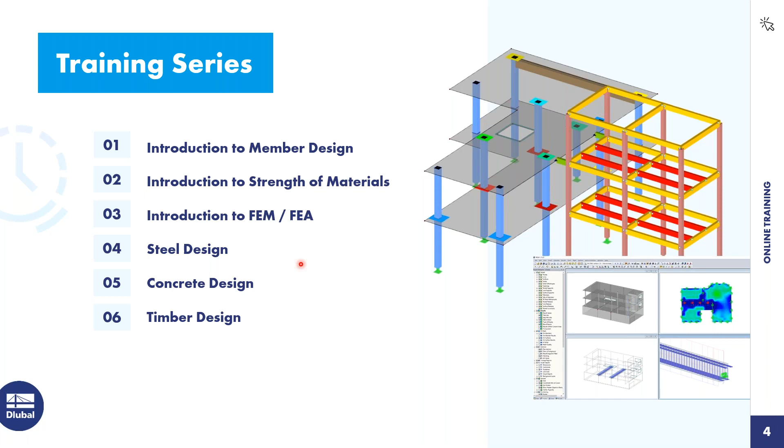Good, so our training series, 6 parts today, the 5th part, the concrete design. What can you expect from today? First of all, we start with an introductory example. We will model together a concrete beam with a cantilever, and then I will forward to Juliane and she will show you how to design our concrete slab. So let's jump right into it.

No theory, only modeling in RFEM 6. So I will open this example and create a new model. For this case, I think it's familiar for you. I'll go to File or click on New Model, and now I create in this dialog a new model with the name concrete beam. I will leave it here as 3D type of model and everything else as is.

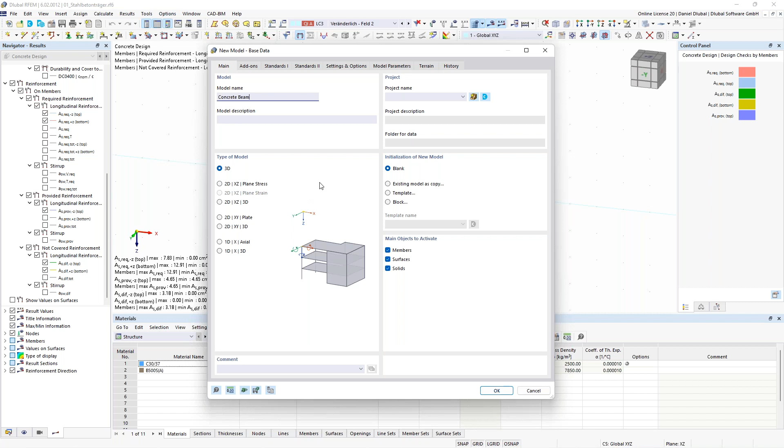And now for me it's important to activate the add-on concrete design. So here we go to the design add-ons, activate concrete design, because then we get additional design properties for our concrete beams or concrete slabs. So I have to activate this.

When I have activated this, I go to the 3rd tab, Standards. And here in the Standards, I see different chapters like for the design, standard group, load results, and also load case classification. Here I want to design it according to the European Eurocode, with the national annex of Europe. Okay, I will leave it like that and just click on OK.

And a new window opens. And as you can see on the left side, I have already some materials and section thicknesses. They are remembered from the last project I did.

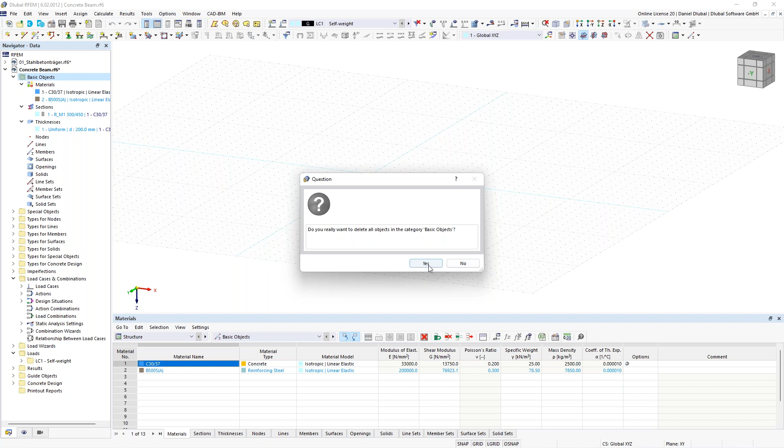So I will delete them in order to create all these 3 things by new, just to show you how to do it. You can click on basic objects with the right click and say, okay, delete all basic objects. And now we can create it from scratch.

Okay, so before we do this, I would like to know from you if you already have some skills in concrete design with structural analysis programs, just to give me a kind of status about your knowledge regarding your concrete design skills. So I have prepared a poll, which I will start right now. Please answer these questions in order to give me feedback about your knowledge.

Most of you have voted. I'll close this and share the results. So most of you have already designed concrete structures in a structural analysis program, I hope it was RFEM 6 or RFEM 5. For those who don't have this experience, that doesn't matter, you'll learn it today.

So back to RFEM. Here on the left side in the data navigator, I will create two materials because for concrete structures we need two materials: one for concrete and one for the reinforcing steel. I go to new material, and one of the biggest advantages in RFEM 6 is that I can search for a material via this text box. I enter C30/37. I'm from Germany, so I'll design it according to the Eurocode because this is the only standard I know, and this is why I choose this one.

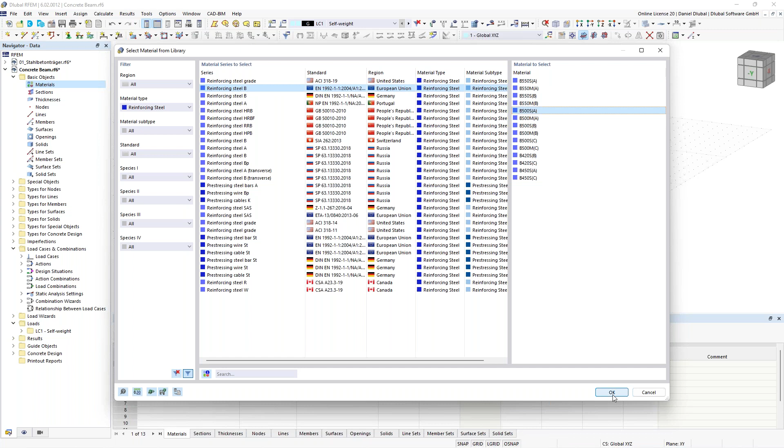The next step is I create a new material again, and here I go to the material library looking for the material type reinforcing steel. I can filter according to different material types, and the one I'm looking for is reinforcing steel, in this case reinforcing steel B. Here I see different things: B500 or 550 is for the yield strength, A and B is for the ductility class. A is normal, B is high ductility, S is for normal member reinforcing steel, and M is for mesh reinforcement. In this case I choose B500 SA, click OK, and that's it. I click OK again.

The next step is to create a new section. Since we will model and design a concrete beam, I click on section, new section, and choose this rectangle massive cross section, or if you don't have it, go to the cross section library and choose the massive rectangle. Then I give the geometry: a width of 300 millimeters and a height of 450 millimeters. Then I can see the section values according to this geometry and also the stress points, and if I want, I can also show the unit stresses. In concrete design this is not so important, but we've implemented it here too. That's everything, I click OK.

Thicknesses, I won't do right now. This will be more the part of Juliane, because she will show you what thicknesses are. Thicknesses are similar to the cross-section things for members. It's a similar concept: thicknesses you need for surfaces, and sections for members.

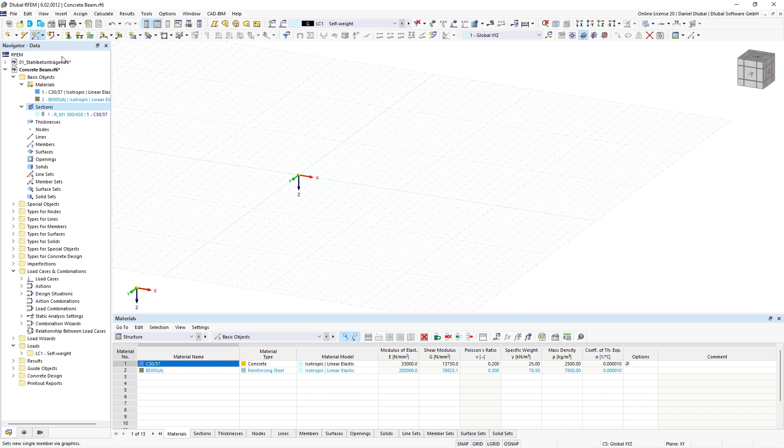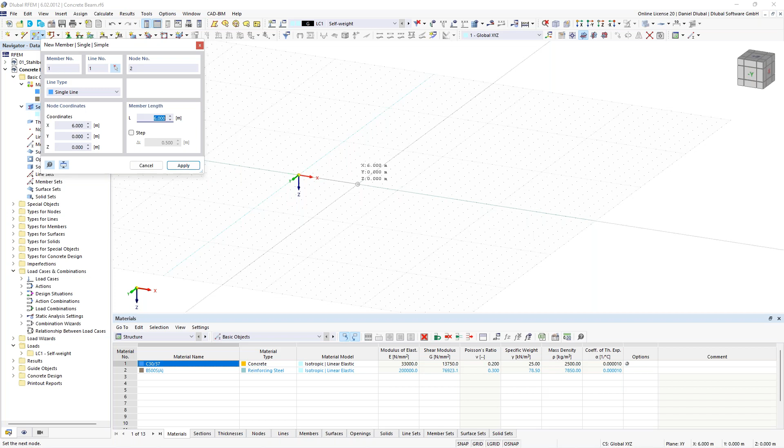So now we will model it together. We will model the beam. I go to the symbol bar, click on new single member, and now I choose the right section since I only have one. I click OK and draw this member 8 meters long. I can do this via the grid points or by inserting the member length directly, like 8 meters. As you can already see, we already have the provided reinforcement based on some general information about this concrete beam. We can modify it afterwards, of course.

What I want to do right now is divide this member internally, so the member remains as one member but we add an internal node. Double click on the member, activate the option nodes on member, and I want to switch to an absolute distance. I say from start, please 6 meters away, and here you should create a new node. I click OK, and you see this blue node. Double click on this node - it has the node type on member. This is a really nice opportunity: giving this node the option to be part of this member without dividing it.

So the next thing is support, node support. I create a new nodal support. I also want to activate the rotational constraint around the global X axis in order to prevent torsion, and then a roller support along the X axis. This is the one, I click OK. Perfect, so much for the modeling.

Now let's go to the load cases. I go to the symbol bar, edit active load case, and here I have the self-weight, this is okay for me. Now I want to also consider an imposed load case. In this case we have two fields, one field and the second field. So I create the first one, this is imposed load field 1. Now I copy it and click field 2. Now I choose load case 1 so I can jump to load case 1 where I set some loadings.

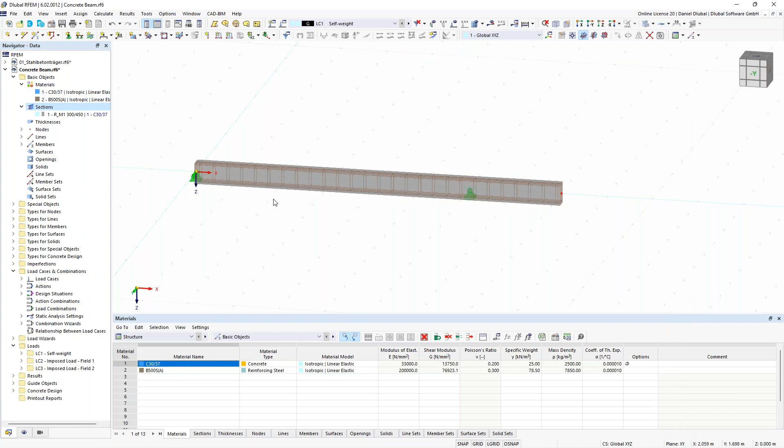So the whole concrete beam has a member load of 10 kilonewton per meter. I click on this member load and insert a value of 10 kilonewton per meter.

The biggest advantage here in RFEM 6 is that I can stay in this dialog, just select the same member, and then afterwards change the load case and add the parameters like the load magnitude again to the members. I don't have to leave this window. This is a real good advantage. So I click here on this member and say apply and next.

Now I change the load case, and now I have to change the load distribution because we only want to apply the load on the left field. So I say trapezoidal. Here in this case, I have 20 kilonewton per meter, 20 kilonewton per meter on the right side, and the load distance goes from 0 to 6 meters.

I say in this member, please apply and next. Now I change the field and say from 6 to 8. I can insert here 1, say okay. Now let's do a check. Okay, seems good. So back to the load cases.

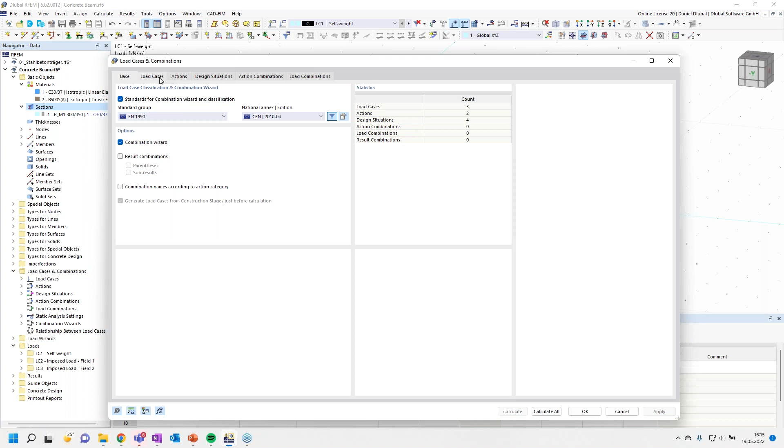Maybe a few words about that. We have here these load case classifications according to the European standard, the Eurocode, and we also have this combination wizard, which helps me combine different load cases with each other, considering the partial factors. We see here these different actions, and depending on these actions, it will get the right factors for combining it, and according to the design situations, it will combine it.

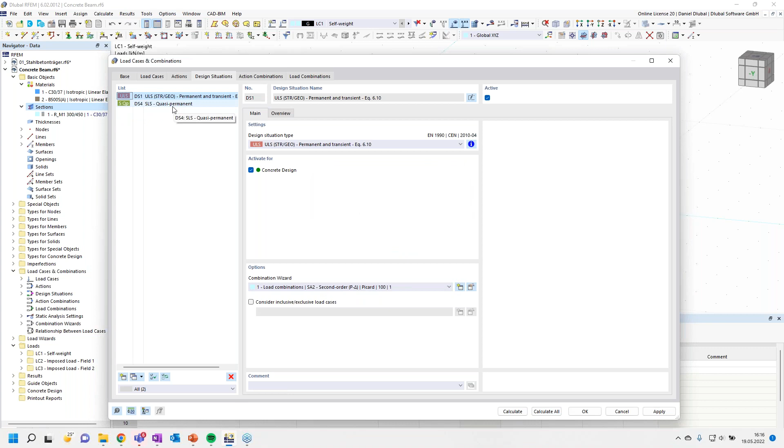You can also take a closer look at the combination rules, like here. For our simple example, we don't need so many design situations, so these two serviceability design situations, characteristic and frequent, I will delete. I only need the ultimate limit state and the serviceability design situation, quasi-permanent. Let's go to the action combinations. Here are the factors I need for my load combination. Okay, good, this is everything.

Now click OK. And now I need to define my design properties for my concrete design. So where can I do this? Double click on the member of this concrete member, and now you see the design properties. When I have activated the add-on in the base data concrete design, this option will be activated automatically. I can also deactivate this, and now you see all these registers in the upper menu will disappear.

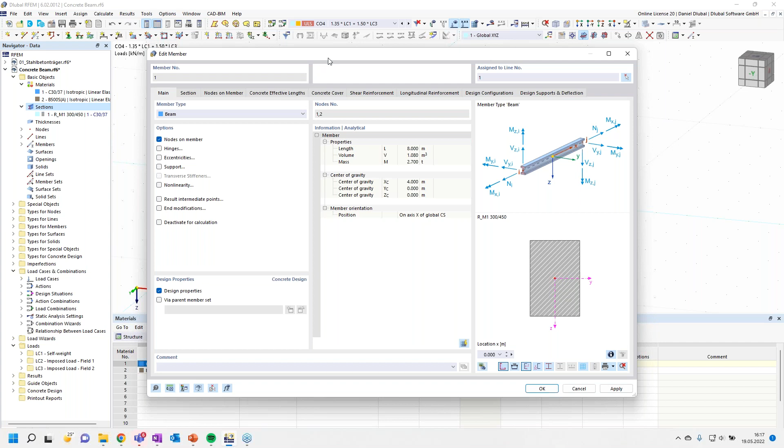When I activate it, the other tabs are there. So what we do now is go through these tabs. What we don't need is the concrete effective length for any stability proofs, but this is a classical bending member, so I can neglect this.

So I go here to the concrete cover. The concrete cover is pretty clear. You have different exposure classes in order to determine the concrete durability. You can open this. Now it's for all section sides. You can modify it. You see here these different exposure classes. Here you have XC1 up to XC4 due to corrosion induced by carbonation.

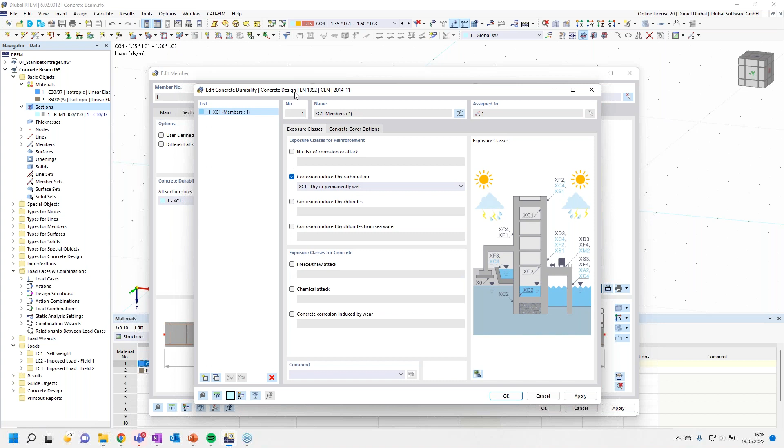Or also here when I want to consider exposure classes for concrete freeze-thaw attack and so on, and through these exposure classes, the minimum concrete cover is determined. For our simple example, XC1 is okay. I say okay again, and this minimum concrete cover is determined from the outer edge, from the concrete rectangle to the outer edge of my stirrup reinforcement.

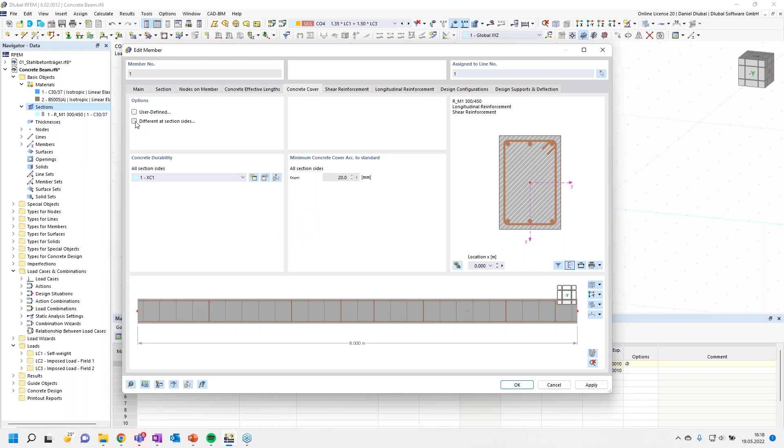These are 20 millimeters, determined by the exposure classes. I can also say a user-defined concrete cover, or when I want to consider it for each side differently, I can activate here this different at section sides option. Okay, so much for the concrete cover.

You also see on the left side you can add more shear reinforcement spans, then you can separate the distances into several fields within this member.

Okay, now let's go to longitudinal reinforcement. Here I also have some possibilities regarding the rebar type, symmetrical or unsymmetrical, and in this case I choose unsymmetrical, which means the top side and the bottom side are different. So for the top side I choose 2 and change the diameter from 20 to 12, and I also want to activate a lateral side bar with 10 millimeters. For the bottom side, I choose 16 millimeters. Okay, so much for that.

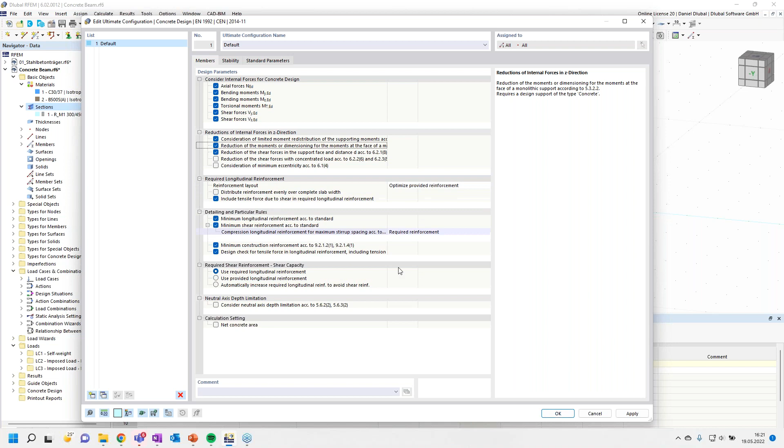Here you can define several other options for the design of concrete, these are the information given by the standards. And the same also for the serviceability, but this is some more information.

Now the last tab is the design supports and deflection. So when you want to design the deflections, the deformation proof, you have to define different design supports. We do this for this simple beam. I create a new one with a support width of 360 millimeters, and it's no inner support, only support in Z-axis. And now I create a new one, also with 360 millimeters.

It has a monolithic connection, and the ratio of moment is in this case 0.9, and I don't need to consider any Y-axis. I click OK.

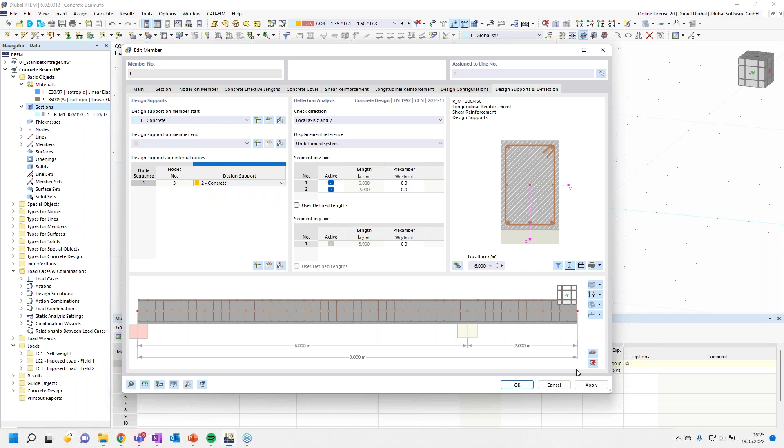Now I have to assign it to the right nodes. So that is on member start, this is correct. And now here to the middle, the second one. Oh sorry, no this is not correct. Now this is correct, I say OK.

And now I can calculate it. Let's say concrete design. And now you see how the whole situations are calculated, also for the serviceability.

What I don't need is to design for the serviceability limit state, I'm only interested in the results of my ultimate limit state. So I calculate the concrete design again. And now I see here the different design ratios for members, and I see here detailing of members, and also the ultimate limit state section resistance is not fulfilled.

So what can I do? I need to strengthen my reinforcement.

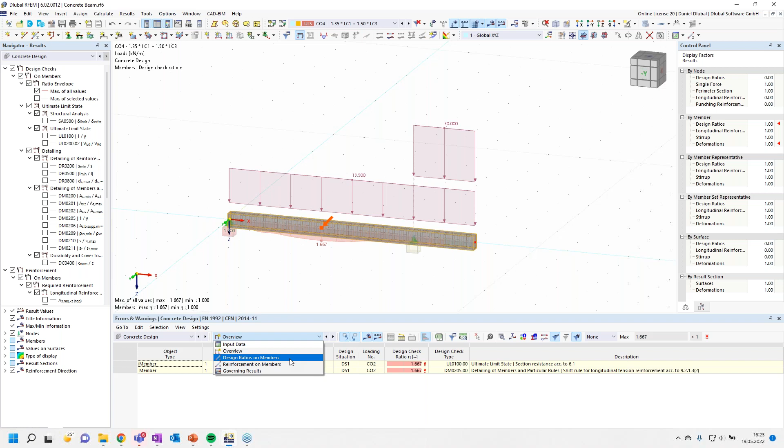Maybe here some words to this reinforcement. Here on the left side, I see the results navigator, and here I have the possibility to show different results, like the reinforcement.

So I see here the required reinforcement, maybe I deactivate the design check. I can show the required reinforcement for the top and the bottom. For the top and bottom reinforcement, I can also show the stirrups and also the provided reinforcement for the bottom side.

I can deactivate here the rendering of the reinforcement by going to the display navigator, to types of concrete design, and deactivate it. And now I can see the result a little bit better.

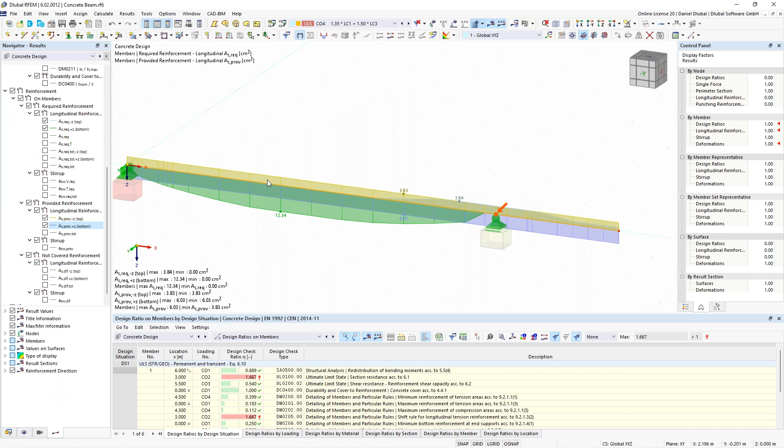So I see my provided reinforcement is lower than the required reinforcement, so I need to add some more rebars. And in order to calculate the difference, what I need, the not covered reinforcement, I can also show it. So what can I do?

Go back to the concrete beam, go to the shear reinforcement. Now we want to add more rebars for some places. So I go here and copy it. And now I want to cover it for different fields. You see the start and end goes from 0 to 4, I say this should go to 6.

And this one should go from... sorry, this should go from 5 to 7 with a distance of 0.1 meter. And the other one should go from 7 to 8 meters.

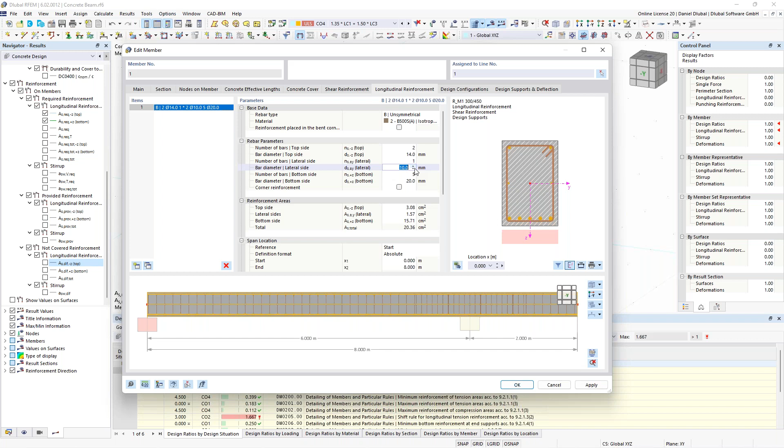And the longitudinal reinforcement, let's make it quite easy. What I can do is just increase the diameter for my top side and add a diameter for the bottom side to 20 with 2 bars more. And it looks like that. I can show this reinforcement plan by clicking this icon, and I see it like that.

Then I click OK, I design it again. And now I see my fulfilled design check ratios. And by clicking on one of these, like this one, you see this design check.

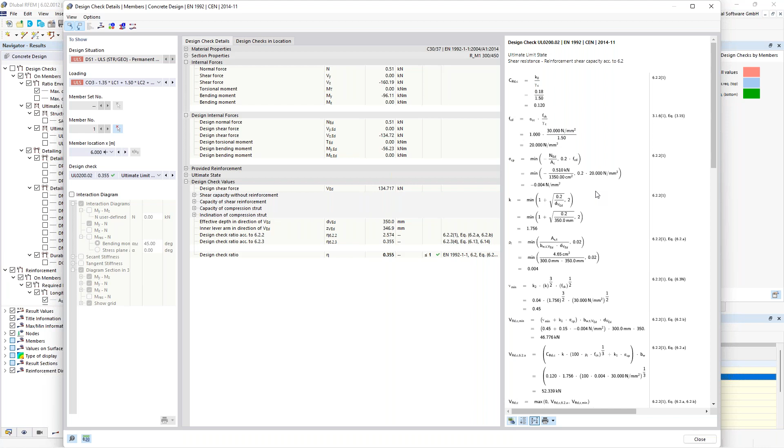Also you can switch to different design checks. In this case, we have the design check according to this standard, shear resistance, reinforcement shear capacity. And when you want to compare your results with the results of our program, you have an overview of how the program did this. Okay, so much to the beam design.

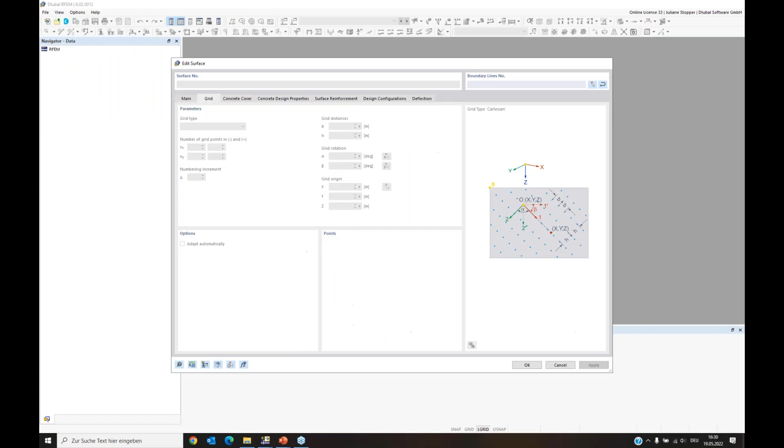Now we can go into the program and start modeling. I will again open a new model with this icon here, and we get into the base data dialog. I enter the name, it will be a slab, and it's made of reinforced concrete. As additional information, I give it here.

The other settings we don't need to change. Again, we have to activate our design add-on, the concrete design, and in the standards, I also want to keep the National Annex CEN as Daniel did. Okay, so we can agree and say this is okay.

So now an empty model is prepared for us and we can start modeling. I would like to use a guide object with you. I would like to use a background layer.

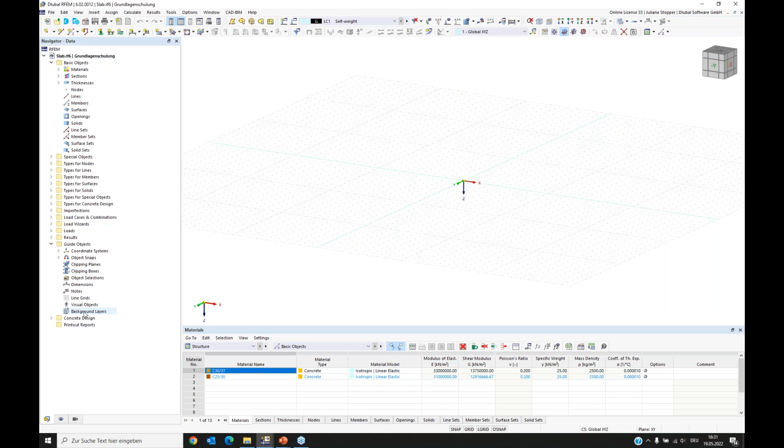We have a drawing from the architect in a DXF format, and we can use it as an orientation to create our RFEM6 model. I have to get the file from my folder where I put it, and I have here the ground plan for our slab. We have here the preview, we can check it, and looking at this, I can see that I need to rotate it with an angle of 180 degrees around the y-axis.

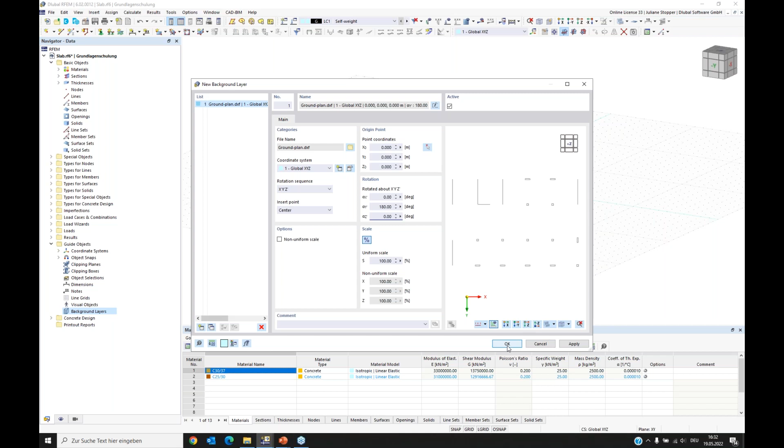Now in my preview, I see this is what I wanted. I want the ground plan to be positioned like this as a background layer. So I can say okay, and I have it in my model now.

So all these lines are DXF objects. Now I need to create my objects that I can use for the RFEM6 model and the analysis. Therefore, at first I want to start with the lines. I will create the boundary lines for the slab. We have one here, and we have one here.

If you want to end any process you are in, you can do it with right click, and you can leave the thing you are doing currently.

Now I want to copy this line. I select it, press Control, click on the line, and draw it to here. Okay, and I will do the same with this line. I press Control and put it here, and I've finished my boundary lines.

Then also I want to have lines here, because the lines we see are DXF objects, and I need to have parts of the structure modeled with RFEM6 objects. Okay, so what I also need is nodes.

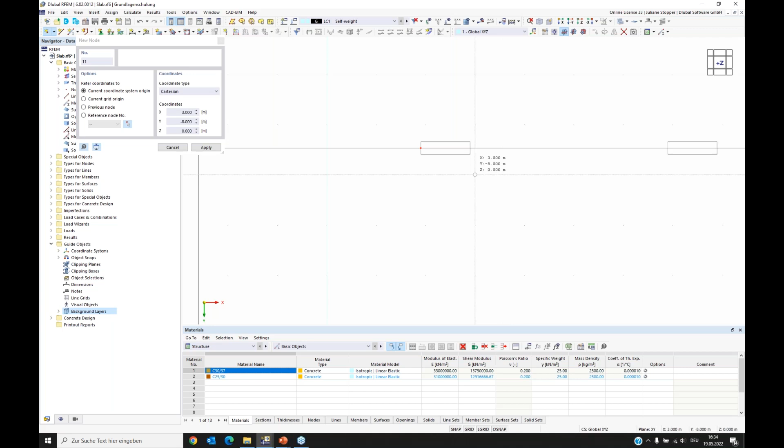So I put this node here, and I put another one here. Now I can edit this node. I double clicked on it and I can see the coordinates here. As we saw, I need 2.40. I can say okay, and it goes there. And here I checked it, I need 7.40, and then it will be at the right place.

So now I prepared the nodes on that line, and I need them actually in this line, and this axis as well. So I have to select them. I want to copy them.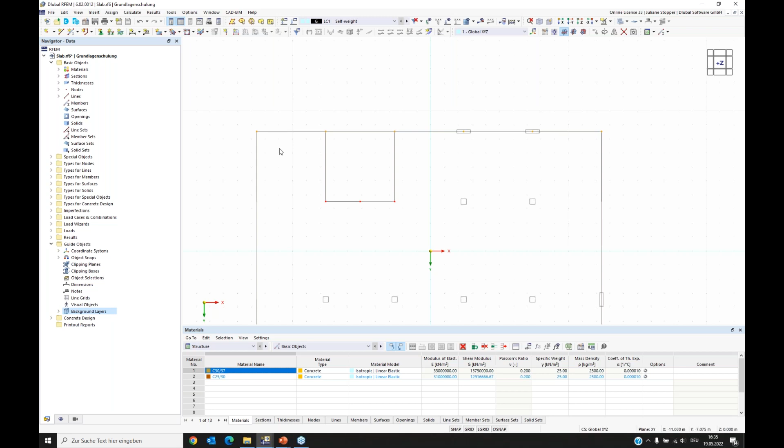With pressing Control, I can again and again add the selection. Now I want to use drag and drop. I press Control and I can take the node and copies are created, and I can put them at the place where I want them. Here's the end of the wall and it fits. Now I can see the newly created nodes again are selected, so I can go on with them.

Now I want to show you this menu. I did a right click on the node. I also can use this move and copy option. I say I want to create a copy and I have to give the displacement vector here, and now I want a vector like this. I can say apply and I can see the program copied it, and I can repeat this and do another copy into this row and say OK.

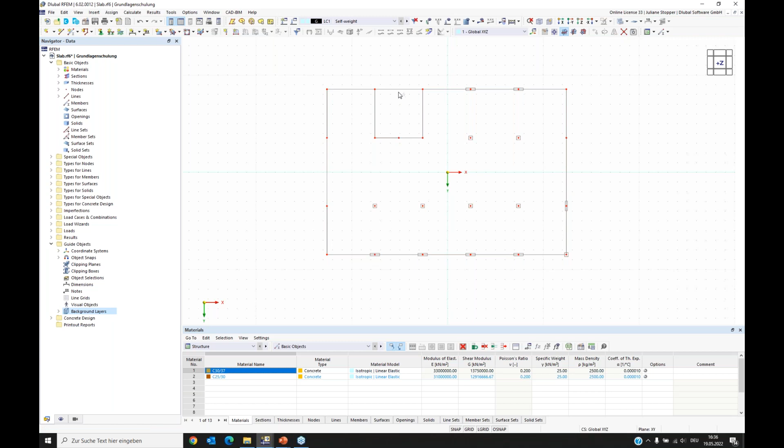And now I see I have all the nodes that I need for modeling. Now there is one thing I want to do. I want to divide this line into parts because when I want to define the surface, I want the surface to be within these lines, so I shouldn't have a line that is not divided. In order to do this, I select all my lines and I can use this option here. And now every line is divided at the nodes or lines that it's connected with. Okay, now I prepared the first step of the geometry.

Now I also want to use the data navigator and work from top to bottom like this. At first we want to check the materials, have a look at the list. I also have the first two materials from my last model and I want to use them with you. It's the C30/37 and also the C25/30 that we need.

One material is missing, our reinforcement steel. So we go to the library and choose for European Union the steel, and I want to have this. What I remembered now is here I will check this. We will have a look here. No, it's okay. I checked the standard because it's important that the standard fits to the standard you selected at the beginning.

But it fits, I have the right standard. Okay, so now my material list is fine. I can say OK and leave this dialog. Then we can go to sections, and I also want to delete it so that we can create it together.

We create a new section, and yeah, it's right, it's going to be the section of our L-beam, and it has the same material like the slab. Here we have provided cross-section types for beams, and we are right, we want to use the rectangular. We can go to this dialog for entering the dimensions.

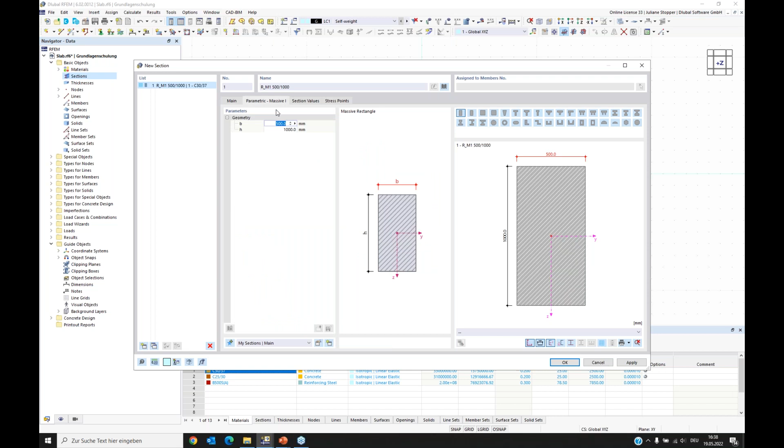Now I will show you. We want to create our L-beam, so we have 24 centimeters and 45 centimeters in the height. And we can enter this: 24 centimeters and 45 centimeters, so 450 millimeters. Okay, then I have my section prepared for the L-beam, and I also will prepare the thickness that I need for the surface.

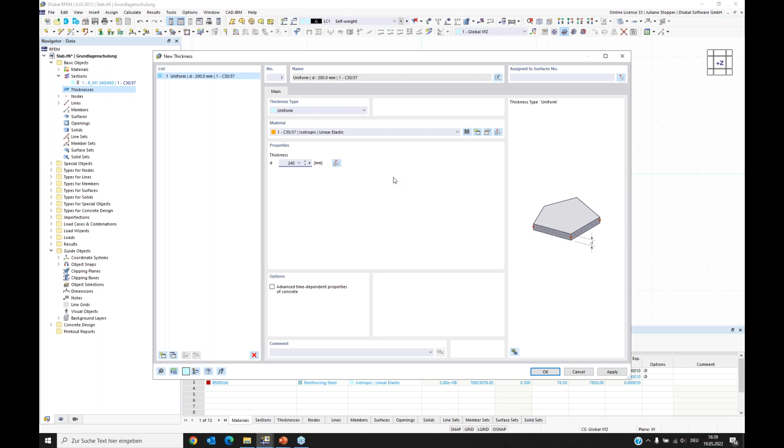As Daniel said, for beams, for 1D members, you need 2D cross sections, and for our surface, which is a 2D member, we need only to define the third dimension, the thickness for it. So we can go here. We have the dialog for the thickness. It shall be a uniform thickness. This is right, it's the material for the slab. It's also right, but it has to be 24 centimeters, so 240 millimeters. Okay, and I say okay.

Now I prepared my cross sections, then I can go on with creating the surface. I could do this from here, but I want to use an option we can reach here more easily. We can define a surface via the selection of boundary lines, and this is what I want to use now.

Here we see the dialog for the surface. Here we can enter all the things, all the options the surface has, all the settings and input the surface needs. It shall be a stiffness type standard. This is good, we have the right thickness and the right material. And as we can see, because we applied the concrete design add-on, we also have design properties. Those I want to have a look with you at later. Okay, so we can agree. And now the program, if we go into our working window, tells us what to do. You can read it here.

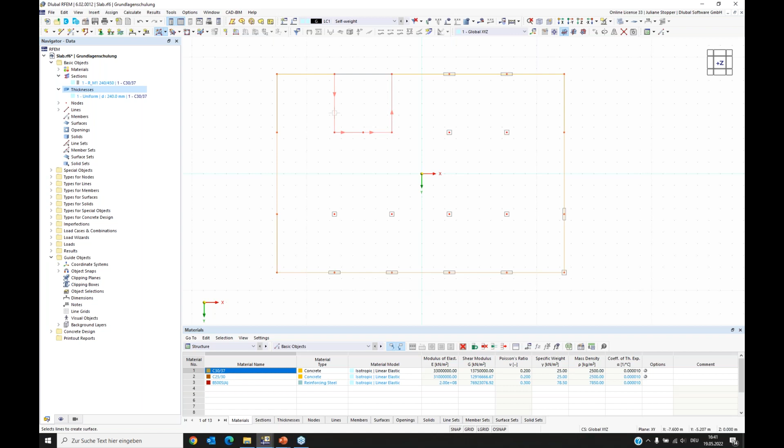When I go back with my mouse into the field, we can see that now we are supposed to select the lines for creating the surface. So I just select the lines, and RFEM6 created the slab, the surface. Okay, I can leave this.

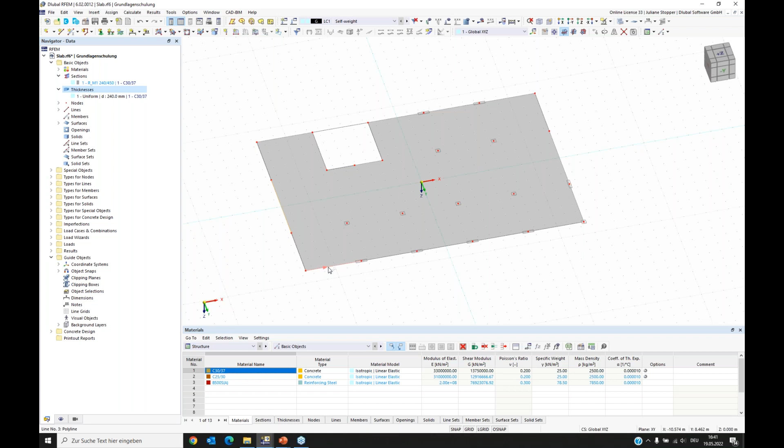I do a right click, and now I'm free again. So now I want to create the L beams. The L beams are positioned everywhere where no wall is positioned at the border lines. So I select all the lines that will get or receive an L beam between the columns. Here's going to be a wall, so I go on here. We have a wall here. Here shall be an L beam, and here are going to be walls. So my lines are selected.

I can do a right click on the line and say edit lines, and I come into the dialog for editing lines. Here I have the option to say that for these lines, there shall be a member along these lines. Then we activate it, and when we activate it, we get into the dialog for defining the member.

Here we can see the member type we have to set in the main window. We have a special member type for L beams or T beams. It's called RIB in RFEM6, and I selected it. Here you can see we want this type of member.

And with entering RIB, we see that a new register opened, and we have to look at it. Here you can decide whether your beam shall be below or above or maybe centric in the surface. We choose the one where it shall be positioned below. Okay, then we can go on.

We go into section. We have to define the section for the member, for the part below the surface. RFEM6 automatically applied the first cross section that we defined, so this is the right one. This is the one we defined, and the material is right as well.

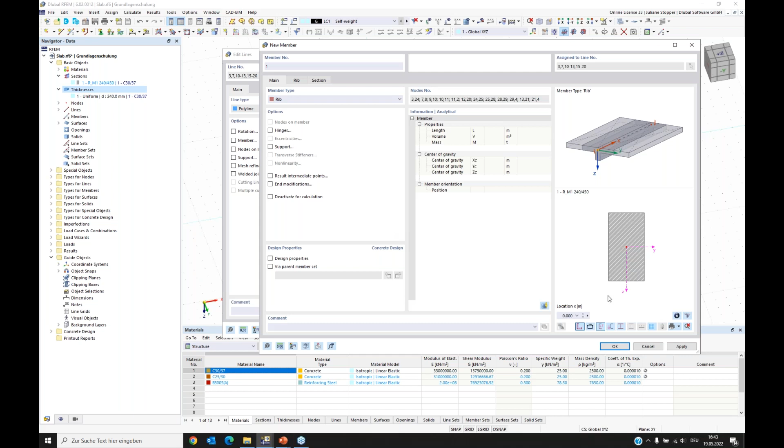We can say okay. What I want to do is switch off the design properties, because today our main object, our focus is on the slab, and we don't want to analyze the design for the RIB as well. So I switch off the design properties. The program then knows that these RIBs shall not be considered in the concrete design. And I say okay and leave this dialog.

And now all these lines have these members that we defined applied, and we can see it in the main window. Yeah, now we finished actually the structure.

As I said, we want to have the design for the slab. So we are actually not interested in the inner forces or stresses or strains in the walls or in the columns. That's why we don't need to model them. We have a special type of support that I want to show you.

At first, we go into the types for nodes. Here we can find nodal supports, and I want to create a new one. We have in RFEM6 the option to give a support that contains the stiffness via a fictitious column.

This means I can activate it, and then a new register is opened and we have a look at it. Here we can enter the dimensions and the material of the column, and RFEM6 from this information calculates the stiffness the column has. So we can model a support that behaves, from a point of stiffness, like a column behaves, but we don't need to model the column, and we don't get inner forces or something. We are not interested in it.

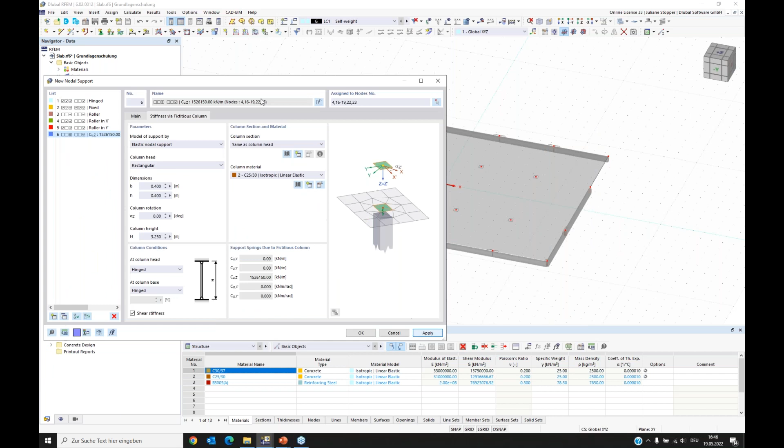And now we can apply this at the nodes where this column is positioned. Here, okay. And now again, I can say apply and stay in this dialog, as I have some more columns, and I can go on defining them. I also want to delete those nodal supports as I don't need them.

Now I can create a copy of the last support that we did together, because it again has a stiffness via fictitious column. What is changing is the dimensions. It's going to be 1 meter in the width direction and 0.25. Let's check it. Yes, 0.25.

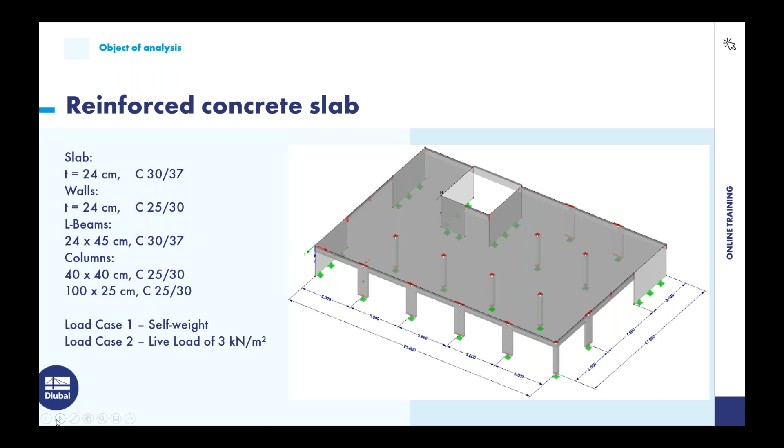It fits 25 centimeters in the height. The height of the column is 3.25 meters. This is right. And the other settings we can keep. It's right from the copy.

Okay, and I can apply these columns here, and say apply again. And I can create a last copy. Here I change only the width and height. And I can apply this or assign this to this node. Now I have all my different types of columns defined, or the supports of them.

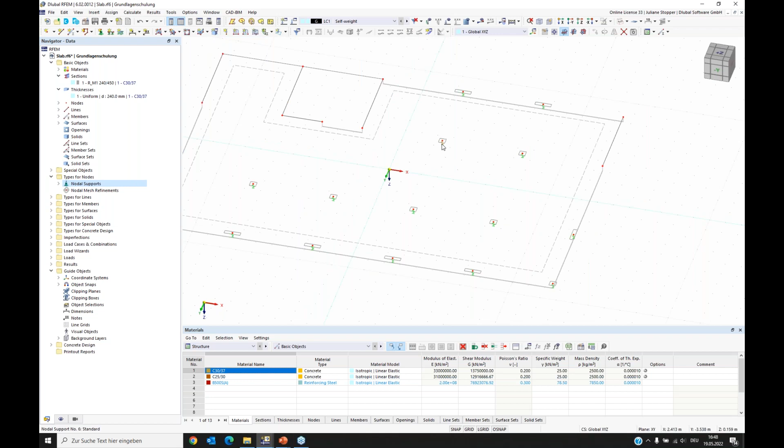And we can see it here. I can also change the display of the model. I can say that I want to see a wireframe model. Then we can see, for example, now the supports more clearly. And if you think the supports are a bit small, you can right click on them and make them bigger. Then it's easier to see them and check whether everywhere a support is supposed to be, one is. Okay, we have the same tool for walls.

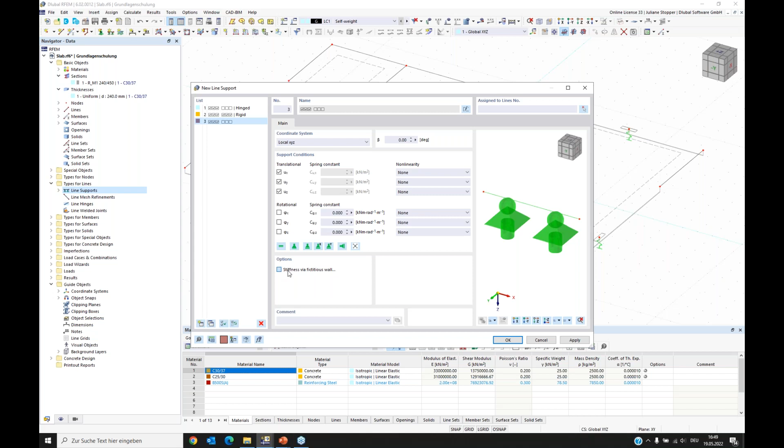We can consider the walls as line supports. So we can now go into the folder types for lines. And here we have the line supports and can create a new line support. And here I have the stiffness via fictitious wall. And I can only reach this option if I activate local XYZ coordinate system. Now you can see it's possible to activate it, and we again have to go here and define geometry and material. The wall has a thickness of 24 centimeters and again a height of 3 meters 25.

The material shall also be material number 2. And now the program calculated the stiffness that resembles the wall. The X direction is the direction along the length of the line, so we have a stiffness in this direction, and the Z direction is the vertical direction. We have also this spring. Okay, now we can assign it to the lines where we have actually walls, and they are these. And here's another one, and I think it's completed. I can say okay, and we are now fine.

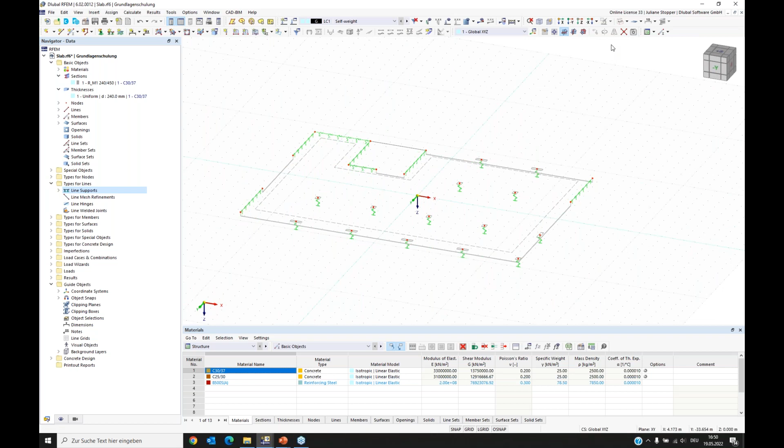Now we have all the supports that we have from the walls and columns. I again go to the transparent model, and I can see our structure. We have finished the structure now. What we need is the loads. So we can close here the settings for the structure and go to the load part.

At first we enter this load cases and combinations dialog. And again we activated the combination wizard as you saw with Daniel. Now we can go to load cases. We have as a default load case, always load case 1 as a self-weight load case. You can also see here the self-weight is active and it's a permanent load case.

And we want to create another load case. This is the live load case. And here we don't want the self-weight to be active, and it has to be an imposed loads load case. It's important that you take care about defining the right action category, because we will do the action combinations. The combination wizard is going to generate them for us, but it can only do it right if you set the right action category. So we have a permanent load case and an imposed load case.

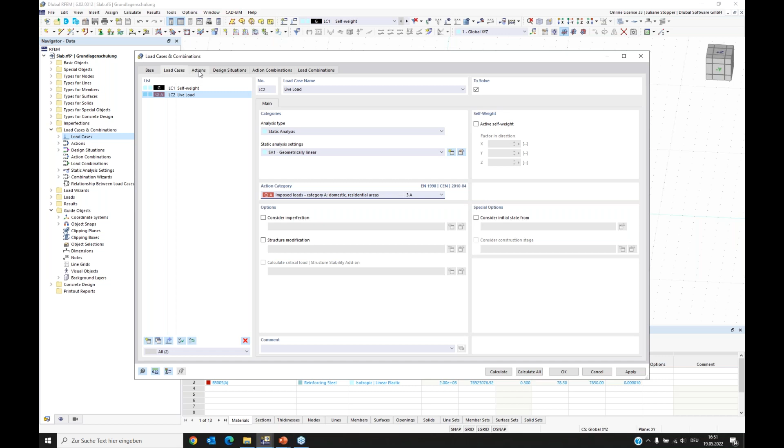Okay, then we can have a look at this. Here you can see which type of action categories you have in your model. This helps when you have a lot of load cases in bigger models to keep an overview. Then we can go to design situations. We have those prepared for the concrete design.

And I want to show you also the combination wizard. Here you can do settings for how the combination wizard shall combine or create the load combinations. And I want to use the geometrically linear analysis. I activated it here, and we don't need to consider imperfection cases. So I can set it okay, and then we can go on.

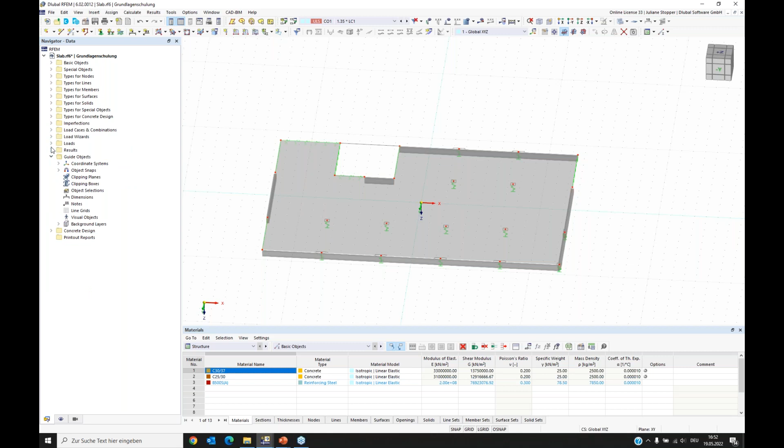We can check the action combinations and see also the load combinations that are generated from that. So now we finished that part. It's okay, we have the load cases and the combinations. Now they are prepared and we need to fill them with loads. We have this folder loads here, and we can see our load cases, but they need to be filled.

We need to say what kind of load has to be contained in the live load. In self-weight, we have a load because we said self-weight shall be active. This means the program calculates from the cross sections and the specific weight of the material, the self-weight of the structure.

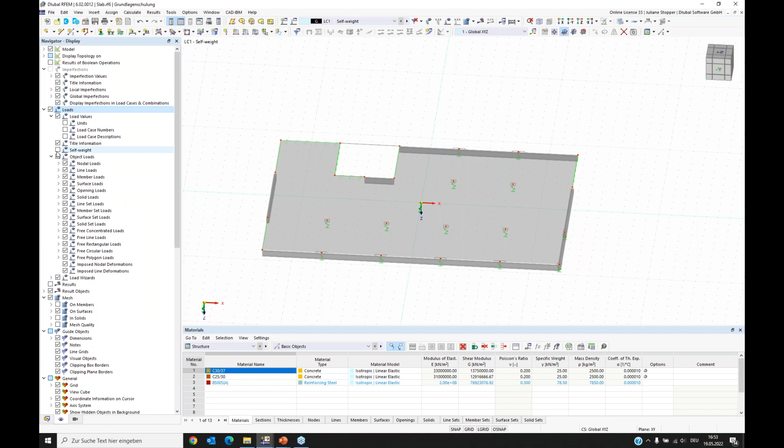So we can have a look at this. I switched from data navigator to navigator display, and here we have the option to activate loads, and within the loads we can activate the self-weight. And then you can see for load case self-weight what the program calculated for the construction parts. So we can see load case 1 has a load. Now we can go to load case 2 and we see we don't have a load yet.

So we create one. We create a surface load with right click and say new surface load, and it's supposed to be 3 kilonewton per meter square, and we apply it to surface number 1, and it's okay. And we can see now also we have a load in our live load case.

So I want to save it once. It's good to save from time to time.

Yes, this is it. Now we prepared our model. We have the structure, we have the loads, we have the geometric boundary conditions. Now our model would be ready to do the finite element analysis. We could calculate the stresses and strains, the inner forces and displacements for this structure.

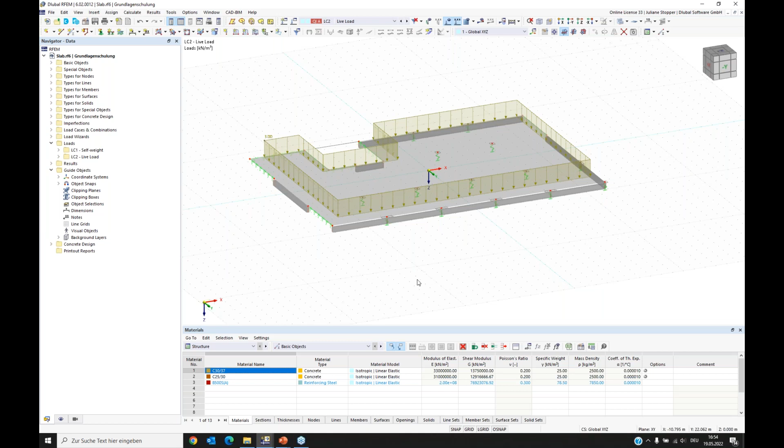What we want to do as well is the concrete design. So we have to define the properties for the concrete design. Therefore, I just double click on the surface and we can see all the design properties that I can set for this surface. Now I want to have a look at them with you.

Here we have the concrete cover. I think Daniel said a lot about it. It's fine, we can go on, I think.

We have for the surface the option to set in which direction the first reinforcement direction has to be. For us, it's now X, and the second one is in Y direction. Then it's okay for us.

We can go on. Now we have the register for surface reinforcement, and we see that our list is empty. So we have to define a surface reinforcement, and we can do this via clicking here.

And then we have the dialog for defining new surface reinforcements. Here we have a surface reinforcement of the type 'on surface'. This means the surface that is assigned will get this reinforcement everywhere, so independent of the geometry of the surface, all the surface will be covered with this reinforcement you define in here.

And I want to, at first for the top, define a reinforcement of 8 millimeters with a distance of 15 centimeters, and in the transverse direction also 8 millimeters with the same distance. The program tells you how much centimeter square per meter you put, and yeah, it's fine for me.

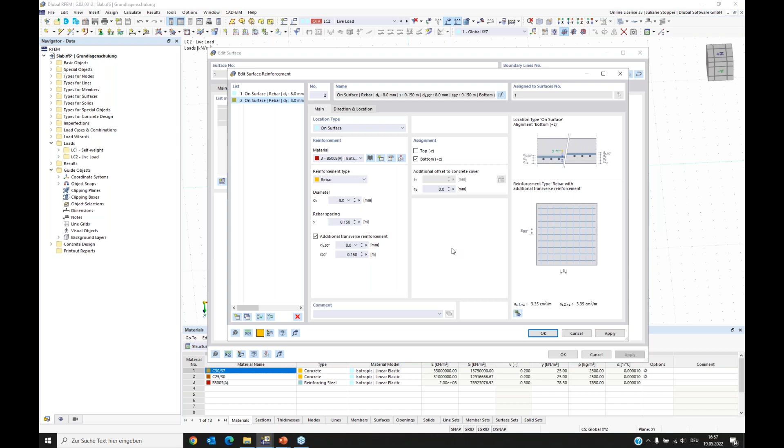I generated and entered two different surface reinforcements for top and bottom, because I can imagine that maybe later I will change one of them. They don't need to be the same. So I can say okay, and now my surface has a reinforcement.

Then we again here have design configurations. We can have a short look into them. With Daniel, you saw those. We can have a look at the surfaces. This is something you should have a look at. For now, for us, we keep the default settings, but you should know what is decided in here.

For example, now we have minimum longitudinal and maximum longitudinal reinforcement defined for plates or for slabs, which is fine for us. But if you want to make the design for a wall, you should apply design configurations for walls and this setting for walls. But for us, for now, it's okay. I can say okay and keep the default setting.

We have something similar for the serviceability state. Yeah, this is what I wanted to have a look at with you for now.

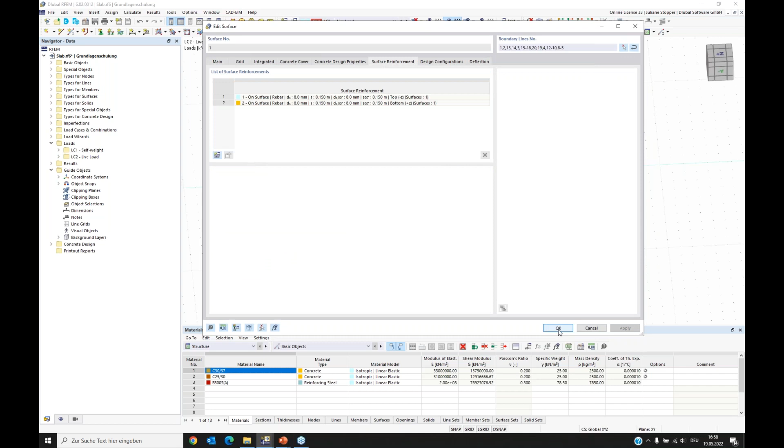We defined our surface reinforcement, and then I close it. And now we also can see it in our graphics. Here I can switch off the loads, so now I can see that my reinforcement is contained in my surface.

So this is it for us. We can now start the analysis, and I want to do it from here. We can here choose the concrete design in the table, and here we have our input data. And for now with you, I want to just do the ultimate limit state analysis.

So I switch off those. And also in the objects to design, I want to say that I only want to solve the surface. Actually, the program sees that the ribs, which are members, cannot be calculated. They are invalid because they don't have a reinforcement, so they wouldn't be contained in any way. And also I switch off the nodes for punching.

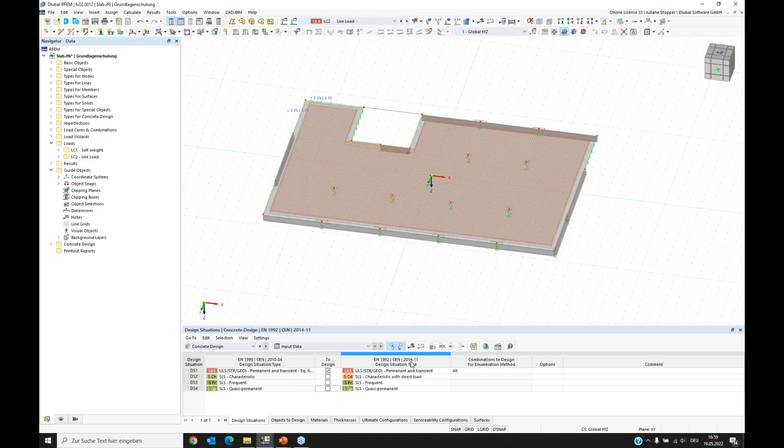So we have our surface. Yeah, and we did these settings. Now we can start the concrete design from here. And I started.

The program knows when we want to do the concrete design, and it also calculates the design situation needed for the concrete design, and the load combinations contained in that design situation. So it calculates everything that is needed for the design. And here we have our result.

As I said, for the concrete design we want to solve the ultimate limit state, which uses design situation 1, and design situation 1 contains all the ultimate limit state load combinations. So if we check one of them, we see we also have results for those. And what I want to show you is here we have our navigator results.

Here we can decide about the view on results, and we can set here also static analysis. Here we have our results of the finite element analysis. I will switch off the mesh, we don't need it. Here we have global deformations, internal forces, stresses and strains, and these results are used in the concrete design.

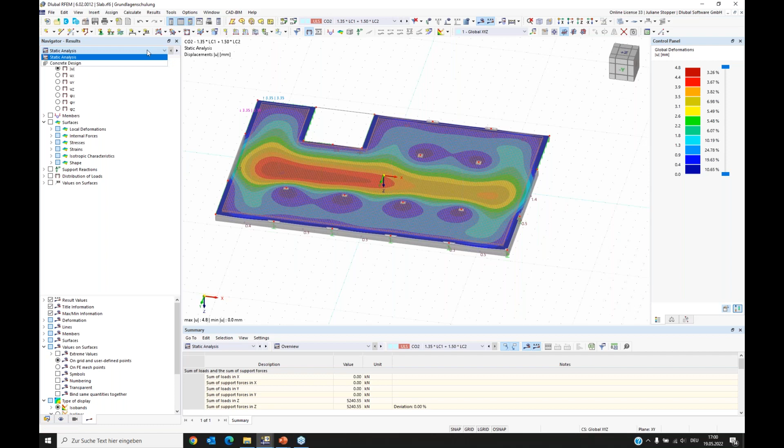So now we can go to the concrete design. I want to now switch off that I can see the reinforcement, it disturbs the view on the results. I can do all these settings for the display and the navigator for display. And in the model, in folder types for concrete design or point types for concrete design, I can switch them off so I don't see any reinforcement, and I can look on it from that direction.

So now we have our first design results, and at first I want to show you this. This is the overview for the design, and it generally at the beginning doesn't look very friendly, as here all the problem points are listed. You see a lot of red at the beginning, but this will change.

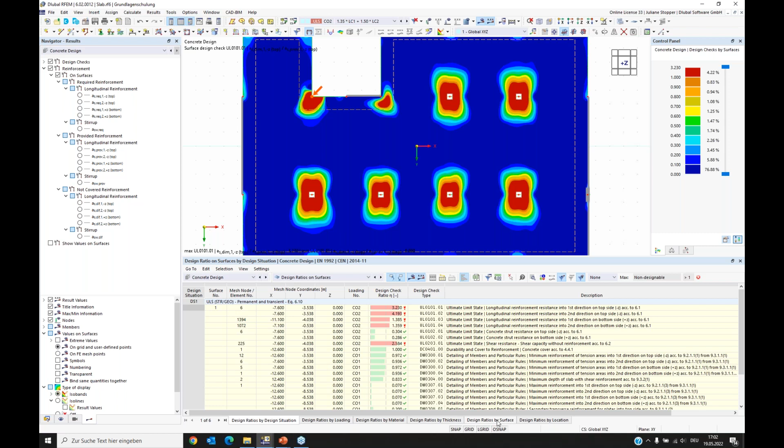I can here say that I don't want to have this overview. I want to see now, for example, design ratios on surfaces. And if you have more surfaces, you can also set that you want to have it separately for each surface. But we have only one now, so this list is fine for us.

Here we can set which design checks we want to see, which design check types. Now we have the ultimate limit state active, and here are also detailing proofs active, and I don't want to have a look at them now. We only want at first to check the ultimate limit state, which is also the much more important thing.

Okay, so now we can have a look at the navigator results a little bit more in detail. We have two main things that we can look at: the design checks or the reinforcement. At first, I want to have a look with you at the design checks for surfaces.

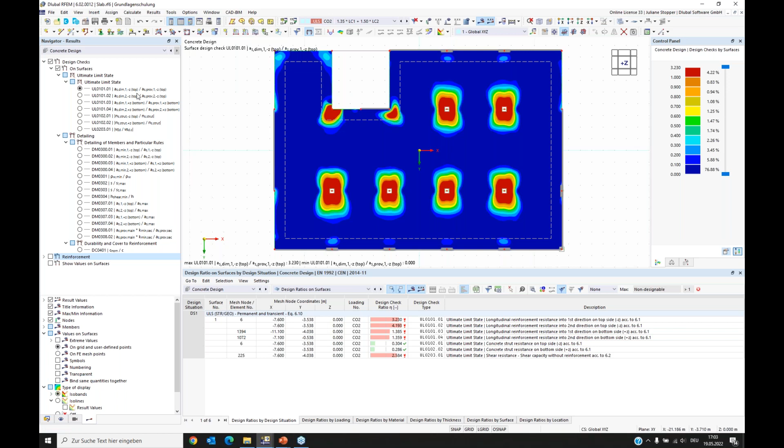And we now are looking at this one, UL0101.01, which is for longitudinal reinforcement in the first direction on the top side of the surface. And this is something we can imagine and expect. We have the highest ratios around the supports, so at the top of the surface we have tension around the supports or above the supports. And the same is true in the second reinforcement direction.

And now we can guess what will happen if we look at the bottom side of the surface. Here we can see that we have the most tension and the highest ratio for these checks in the fields of the surface, as there is tension at the bottom. Okay, these were the results of the design checks.

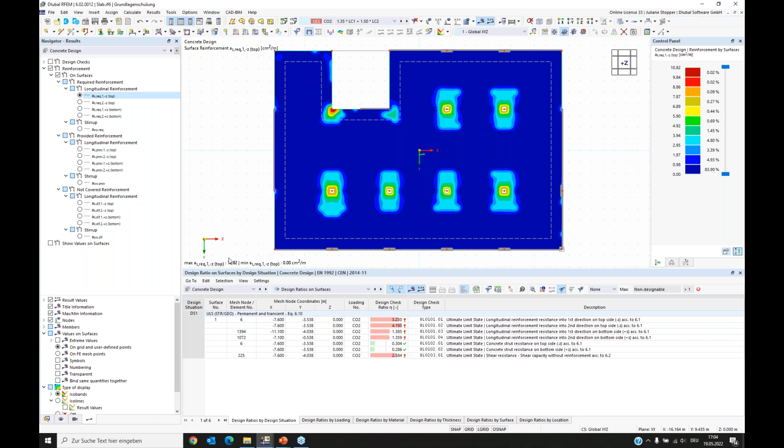And now we can have a look at the reinforcement the program calculated by doing these design checks. We can see which reinforcement is required from all these design checks the program did. And we can have a look at the top: here we can see how many centimeters square per meter is needed for top in direction 1 and direction 2, and also for the bottom of the surface.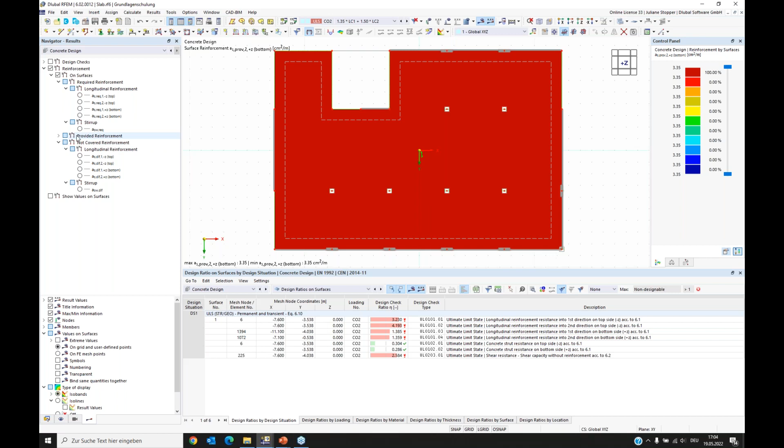What we also can see is which reinforcement we provided. We put reinforcement in there, and here we can see it: 3.35, which we put in each direction at the bottom and at the top. The program also gives an overview about the not covered reinforcement, comparing the provided and required reinforcement and showing where our provided reinforcement is not enough.

And there we can see at the top of the surface, in this area, we don't have enough reinforcement in this direction, and in the second direction like this, and here in the fields.

So the first step that I want to go with you is changing the bottom surface reinforcement. Therefore, I go back to the data navigator, and before I went to the design properties by clicking on the surface. Now I want to show you that all these concrete design settings can also be found in the data navigator.

We have here the types for concrete design, and here are all our reinforcements in the whole model. And here we have the configurations for the concrete design.

But now we want to change our reinforcement. The second reinforcement, as we can see, is for the bottom. I double click on it and edit it. Now I want to put the diameter 1 centimeter at the bottom of the surface. I say OK, and the program gives a warning because our design results will be deleted since I changed the reinforcement. It's OK for us, and I can recalculate the concrete design.

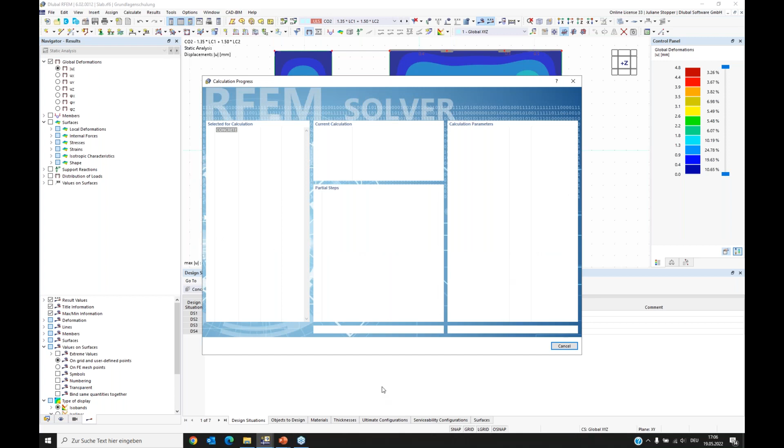Now we can have a look into the not covered reinforcement, and we can see we put enough. We don't have any problems at the bottom of the surface. Now we want to care about the top. I didn't change something yet in the top.

What you can always do is go to the design ratios, and have a look at the positions where the ratio is too high. Like Daniel showed, you can double click on the design check type and compare it with analytical solutions or hand calculations. You can check everything that enters into the design check for the concrete design, and follow the standards and equations, as we always write where each equation comes from. You can go there and compare it, and it's really comfortable to follow what our program is doing in this concrete design. You can find all the values that you need, everything that you did.

Each formula is listed here.

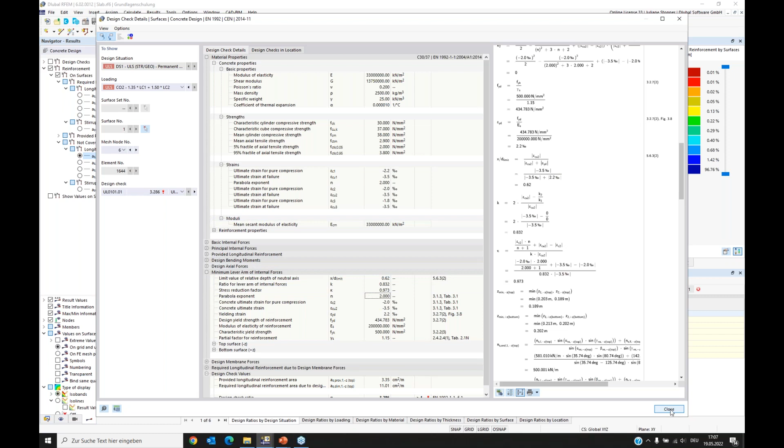When you check this and agree that more reinforcement is needed, you can also put some local additional reinforcement, and we will do this now for these support places.

We go back to the data navigator again, and I right click on surface reinforcement and say I want to create a new surface reinforcement. Here we have the type, and now I don't want to put reinforcement on the whole surface. I want to use a free rectangular reinforcement. The material is automatically entered here.

What I want to do is apply reinforcement only on the top, since I have tension on the top, and I want to have it in both directions. I will put 16 millimeters with a distance of 10 centimeters in both directions.

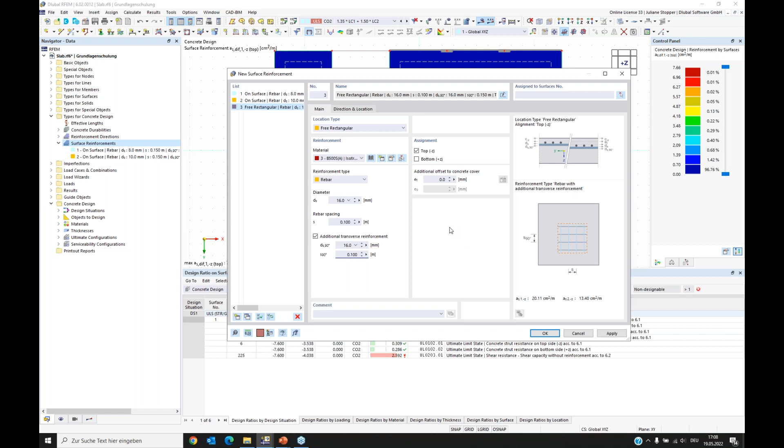So here you can set the dimension and the material for the reinforcement, and here you have to enter the position of your free rectangular layout of the surface. You can also enter which reinforcement direction shall be the first, but we can keep the default settings.

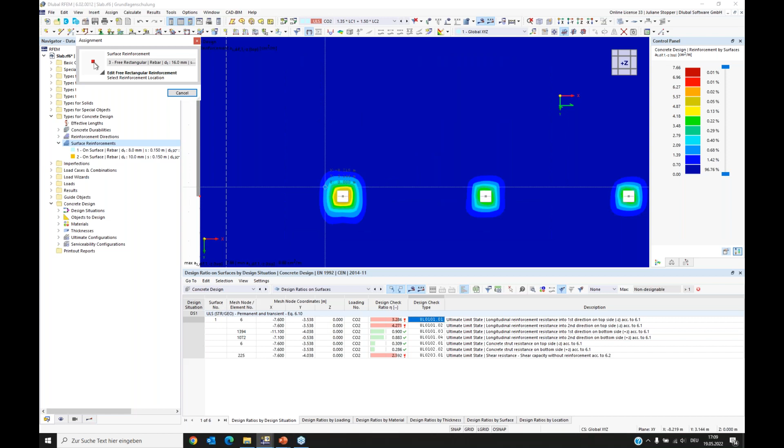What I want to do is tell the position, and I prefer this setting now for our problem. Here I can enter the center, I can pick it on the working window, and I can enter the dimensions - I want to have 3 in this direction and 4 in this direction. It's going to be assigned to surface number 1.

I say OK, and the warning comes again, and I don't want to see results now. I'll also use the wire frame view. I want to show you the reinforcement.

Therefore I again activate the types for concrete design, and here now we can see we still have the surface reinforcement, and some additional reinforcement there. I can also switch off the surface reinforcement type on the surface, and then I can see only my additional reinforcement.

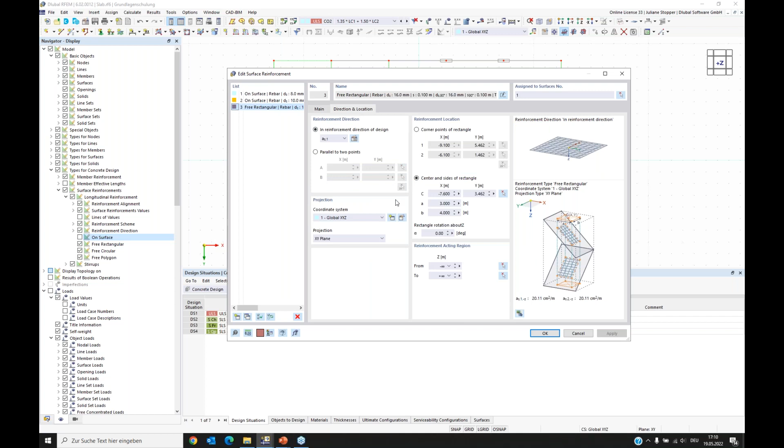I didn't want to have it like this. I want to have it with 4 meters and 3 meters, like this. Okay, and now I want to copy this.

As I see the distance, I want to have this additional reinforcement at all supports. So I want to copy it here and here, and the distance is the same. So I can use this - I can use move and copy and say create copy, but not only one.

I want to have 3 copies now, and I can tell the displacement vector it has to be a distance like this. I say OK, and now my 3 copies are directly generated.

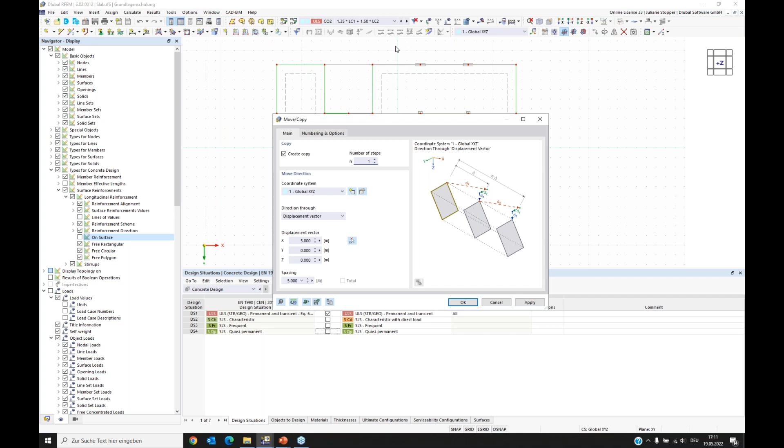I want to also have a copy up to here. I need some additional reinforcement here and also at the corners. So I do - yeah, now it's only 1 because I don't want to have more in the next row. I give the distance, it's the same as from here.

No, I cannot do it like this. The displacement vector has to be from here to here. Okay.

Also I want to put some additional reinforcement here. It's due to the change of stiffness - we have the supports here, and here's no support. Here's the L-beam, and again here comes supports. We also have some singularities here, so I also put a copy there.

Okay, so this is it. Now we can again calculate it and check the results.

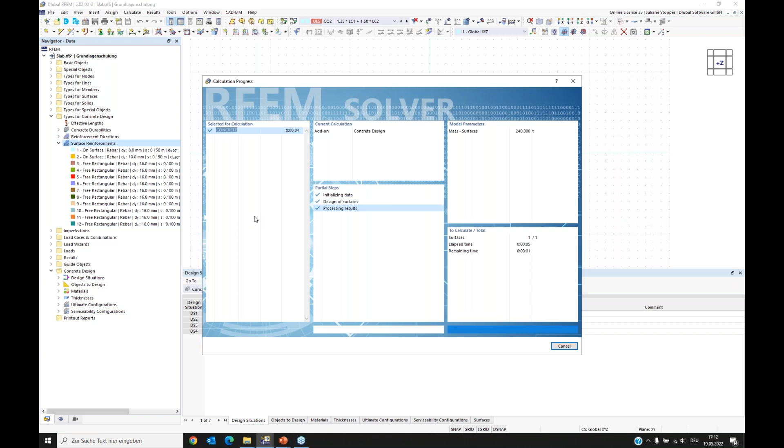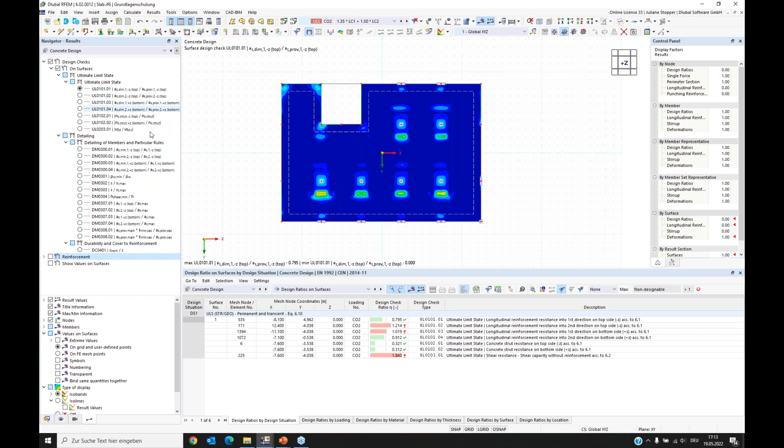I again switch off the reinforcement, and we will go into the design checks and check the top. I have to switch on the design checks and switch off the reinforcement, and now we see the first direction on top, and also the second direction at the top.

We see that at very small places we have some higher values, but mainly we fulfilled the requirements of the standard with our additional reinforcements. So I want to now keep this design.

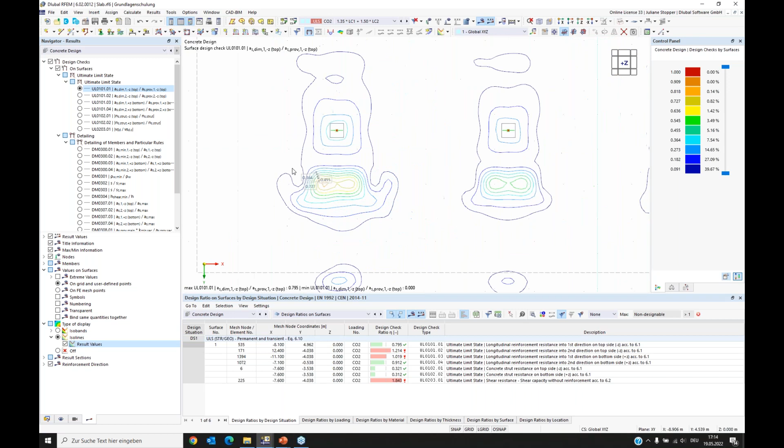I only want to show you a last thing. You can also change the type of display. When you want to print it, for example, it's not very comfortable if you have so much color in it. You can, here in the navigator results at the bottom, change the type of display. For example, you can change it to isolines, and say that you want to see the result values. Then you have the values for each line, and it's easier to print into your report or something.

We have another option which is comfortable for this: you can show values on surfaces. Now it's a bit crowded, so we close this. It showed so many values because it shows the values dependent on the grid within this setting.

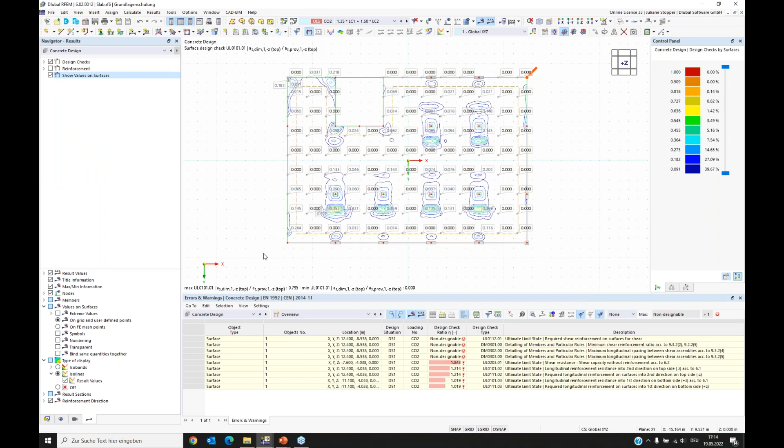We can change the grid in the surface here. We can say we want a grid with bigger distances, so there will be fewer values shown. We can shortly calculate them, and then we can also use the values on surfaces, which is nice for printing it, for example. Okay, so this is it.

This is what I wanted to show you as an introduction into the concrete design for surfaces, for slabs. I would like to give my word back to you, Daniel. I think we learned a lot.

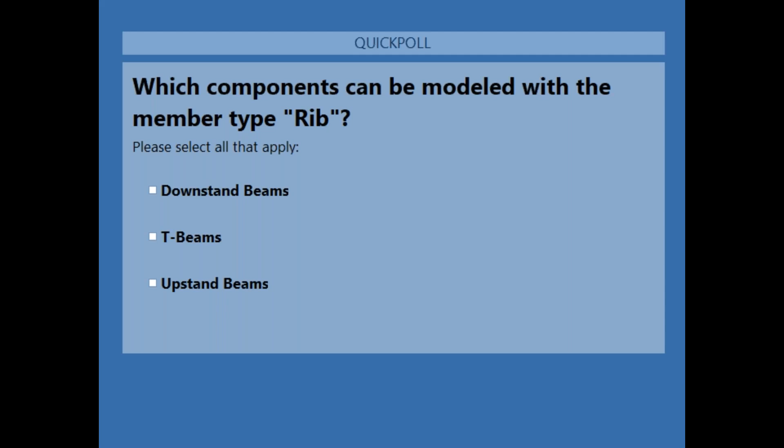So which components can be modeled with the member type Rib? Several answers can be possible. Okay, so most of you have voted.

I close this, share the results. So all 3 questions are correct. With the member type Rib, you can design downstand, but also upstand beams and T-beams. When you want to consider the integration width, you have to use and consider the member type Rib.